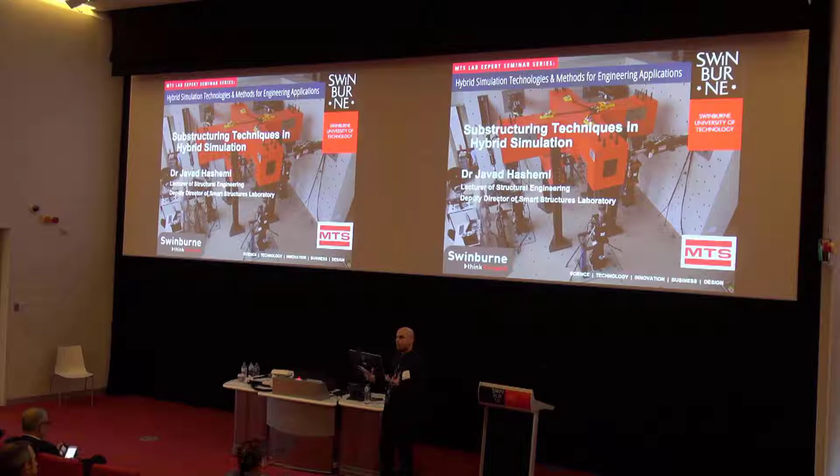So the question that we had was, how can we make sure that the results we get from this hybrid modeling are as accurate as possible?

In this outline, I would like to talk about substructuring first, then introduce some substructuring techniques that were developed, which I was involved in developing: model updating, overlapping domain, geographically distributed, and 6DOF mixed mode control. At the end, I'm going to talk about the development of the MAST system and its application, some projects on the application of the MAST system.

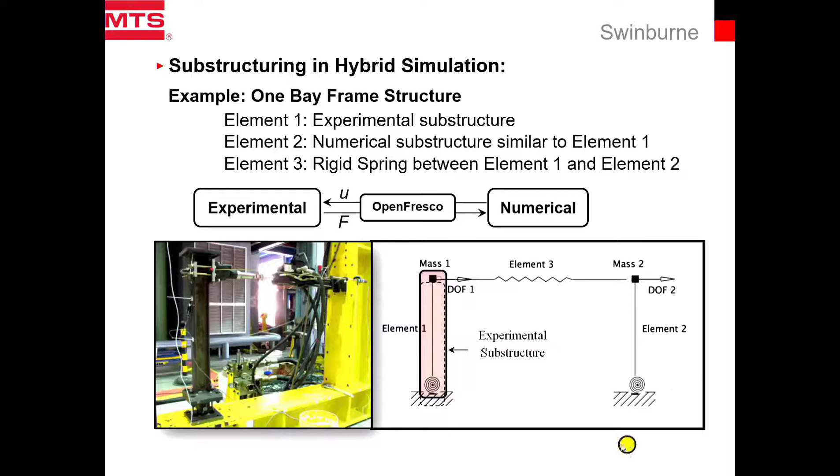So just think about this simple structure. Let's say we want to do the hybrid modeling of this one bay frame. It's very simple. We have two elements, element 1 and element 2. These are cantilever columns. We have plastic hinges at the base, and they are attached together through a truss element, and we have mass at node 1 and node 2.

So let's say resources in my lab are essentially limited, so I have only one actuator that I can use. So that's my single actuator, and just one column, and for the plastic hinge, I use this mechanism to dissipate energy. So that's my experimental part.

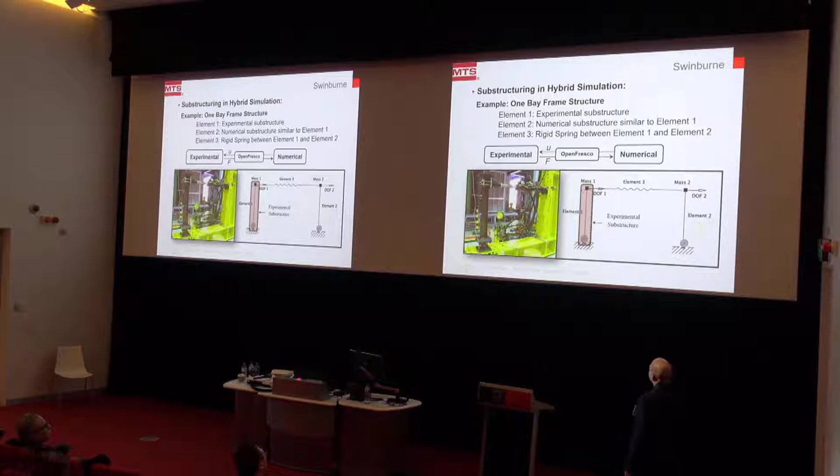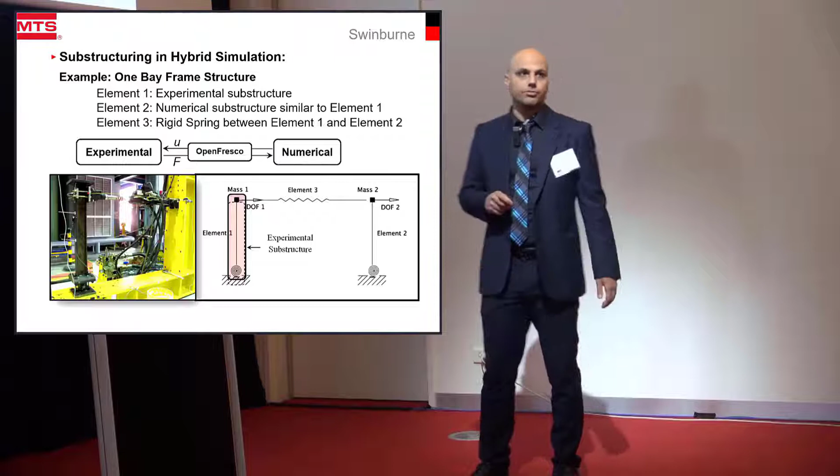What happens is that we model this part in the computer, and we use this actuator to apply the deformation or displacement on top of this column. Then the actuator also measures the displacement and force and transfers this information back to the numerical model. And that happens through OpenFresco, as we discussed in the morning.

So in this example, let's first see how we can model the numerical part. On the numerical side, this truss element, let's model it rigidly. So it's like elastic, rigid. It can easily be modeled in the computer.

Element 2 again consists of an elastic element here, but just for the plastic deformation at the base, we can use the Bouc-Wen model. It's like an example, a hysteretic model where you set some parameters like initial stiffness and the degradation of force and displacement, and you can model this plastic deformation here.

So this one is also modeled experimentally. As you can see, these are identical. The structure has the same design, the same material properties, the same geometry at the base, but because we have limited resources in the lab, we can just test one of them, not the other one.

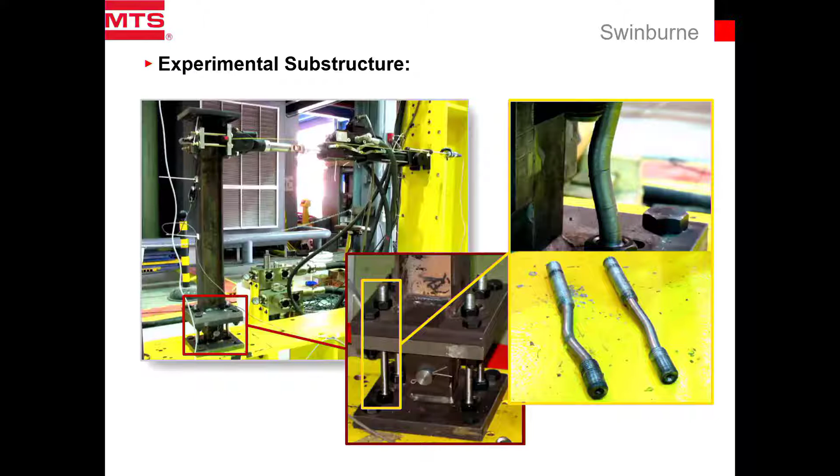And then we subject this to an extreme event. Here we can select an earthquake, which is El Centro, and we want to run the hybrid simulation. On the experimental part, I use this for the plastic hinge. You can see there are these steel coupons, 4 steel coupons that we have here. Through buckling or yielding, we can simulate a plastic moment rotation. The reason for simulating this was just to have sacrificial coupons so we can have repetitive testing when we try things. And of course, we have OpenFresco to help us link these two together.

This modeling was done in OpenSees, so we have all the numerical models, the nodes, the elements, the time integration, everything is modeled in OpenSees. And then OpenFresco is the middleware to connect this system to the lab.

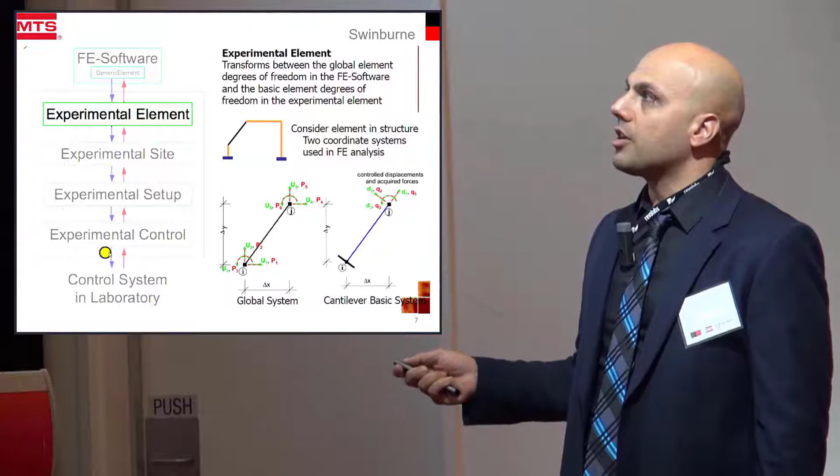I'm not going to go through OpenFresco in detail, but OpenFresco has 4 modules: elements, site, setup, and control. The information is transformed first from a global model to a local model at the element. The job of the experimental element is just to sit within the finite element such that the finite element thinks the model is complete. So that's one module of OpenFresco.

The second module is that the displacements being sent to the lab may not be located next to your computer, it might be somewhere else in the world. So we can have an experimental site.

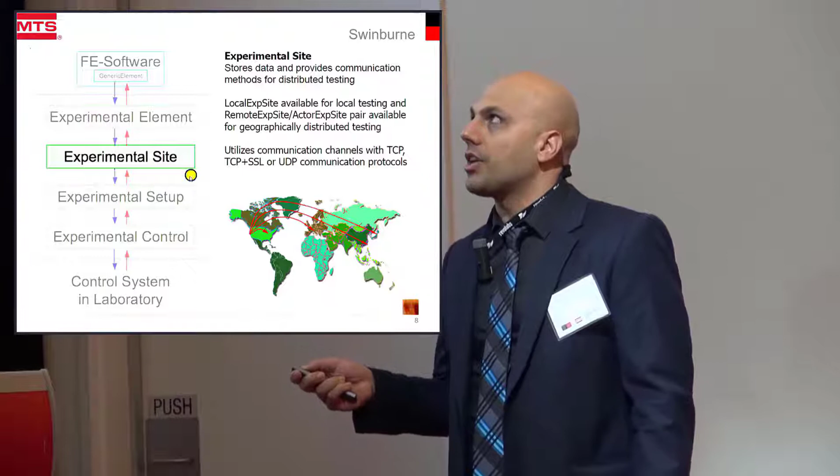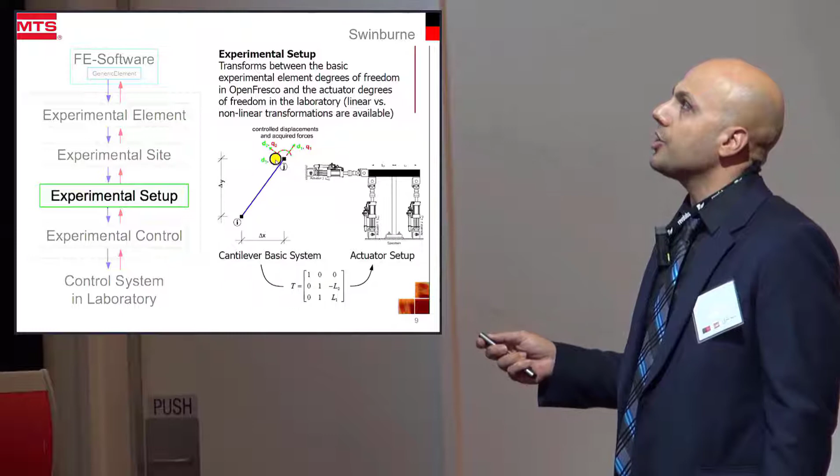Next, the deformations need to be transformed to the actuator system. As you can see, we have these axial, lateral, and rotational degrees of freedom, but in the lab we have actuators like this. So we need another transformation to make sure the actuators move in such a way that we can apply those deformations on top of the element.

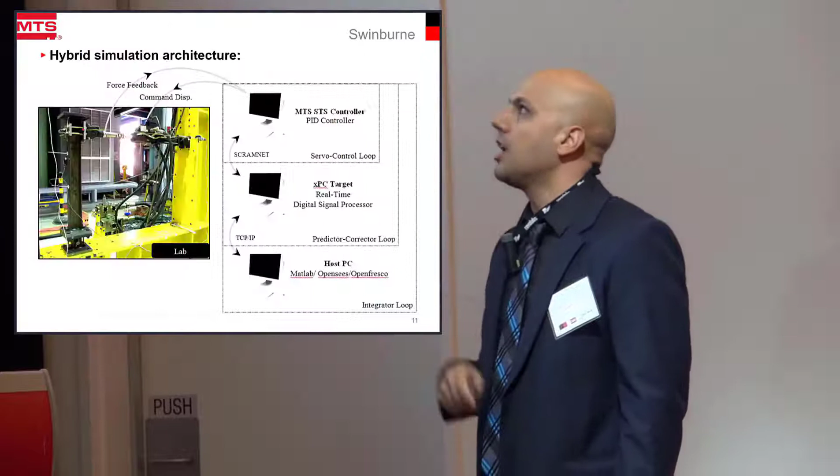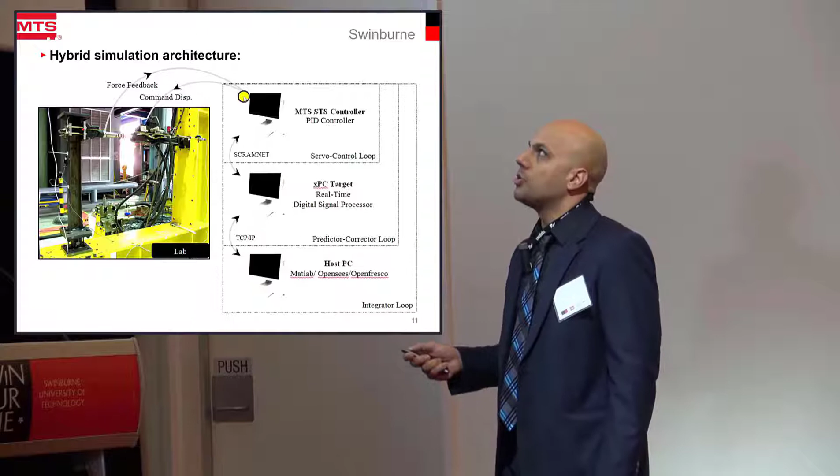And finally, we have the experimental control, the xPC Target, and all the control stuff that other speakers mentioned. Essentially, you end up with this architecture of hybrid simulation: the host PC handling OpenSees, the controller that controls the actuators and reports back the measured forces, and the xPC Target to link different speeds of operation.

Now, that's the result of that hybrid simulation. If you look here, you see the red hysteretic response, the force-displacement hysteretic response, while the black one is the Bouc-Wen model.

If you have a rigid element on top of these two cantilever models, essentially the response for the plastic hinges should be identical, because it's a symmetrical structure with the same masses. So when excited by an earthquake, the deformation applied on both elements should be exactly identical, and therefore the forces should be identical.

But we see that they are different, and that's because of a deficiency in the numerical modeling. Particularly, we haven't set any stiffness and strength degradation, so you see there is no degradation of force and strength -- it's always at the capping point.

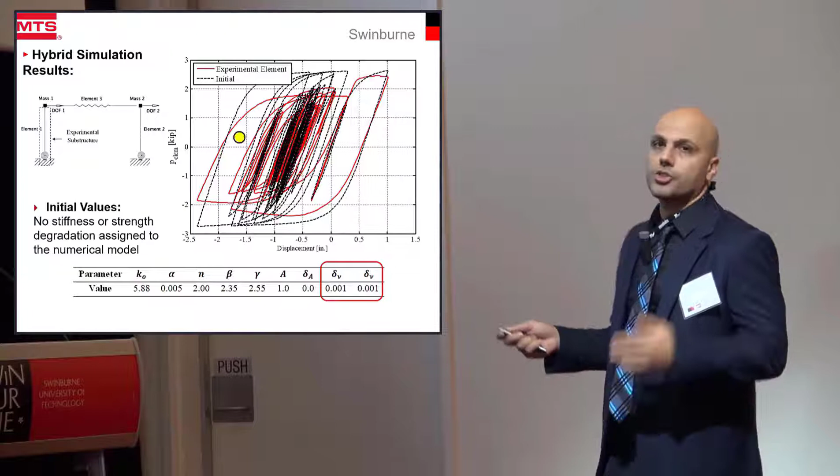Now, this question is being asked frequently -- Sean also asked Professor Mosalam about it -- what about the other elements? You are testing only one, what about the other elements? Professor Mosalam answered that we have used model updating.

That's essentially a new substructuring technique for hybrid simulation. The way it works is that you have the element tested in the lab, but as it's being tested, you start to learn about its behavior. While it's being tested, when it yields, at the same time you can actually update the other models on your numerical side.

Those models that are similar, with similar material properties and geometry, you just don't know the precise yield point to put there. We always say that in a hybrid model, the experimental part is the most critical part -- it's the part that is tested first, damaged first, and we learn about it. We can use that wealth of data to update our numerical model.

So how can we do that? Model updating has been used extensively in automotive and aerospace engineering. For example, cruise control is an online updating model. While the car is being driven, a measurement and sensing system reports to the computer the current speed, and the computer model tries to update the car so the speed matches the target speed you set.

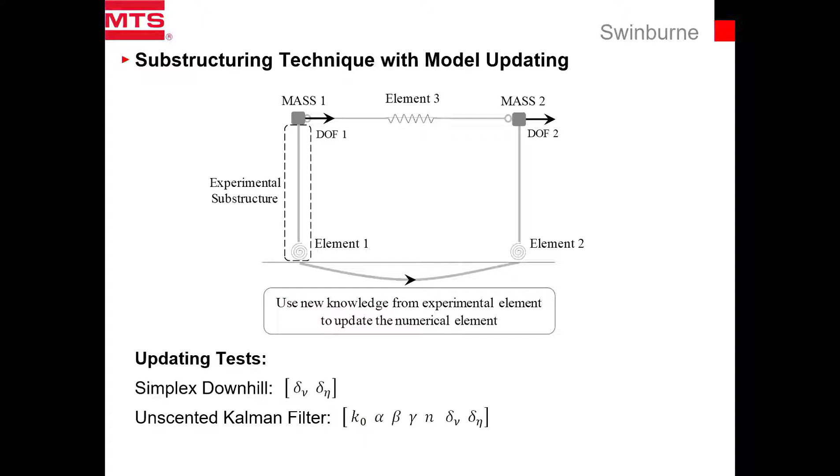That's called state estimation, and I used two packages for that: the simplex downhill and the unscented Kalman filter. They are very famous in automotive and aerospace engineering. With the simplex downhill model, I updated two degradation parameters I hadn't used, but with the unscented Kalman filter, I updated 7 parameters to see if running the simulation would give the same hysteretic response. These are the results.

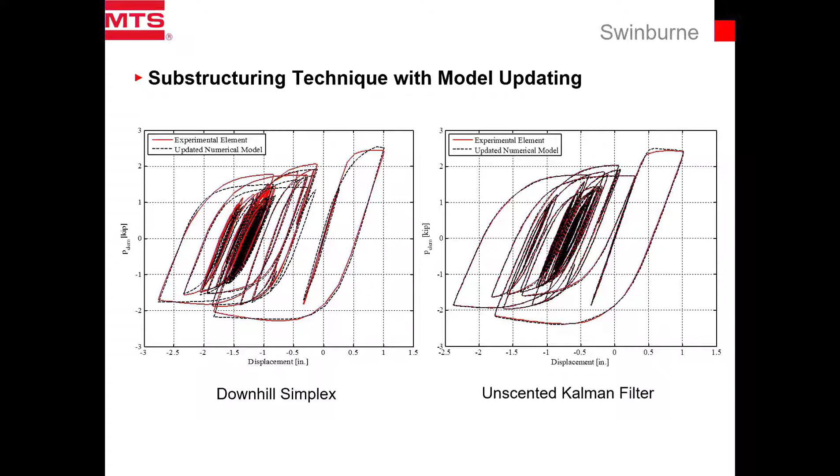You see that with downhill simplex, the results of numerical and experimental are acceptable, but with unscented Kalman filter it's precisely matched. So you can use unscented Kalman filter for online model updating, such that if you're testing part of a structure with distributed damage, meaning other parts will also be damaged, you can learn from your experiment and update your assumptions during the test.

And these are the 7 parameters that the unscented Kalman filter has changed. You see how during the test the parameters have been changed in such a way that you can get that information, or those forces matched with your forces, similar to cruise control matching the speed.

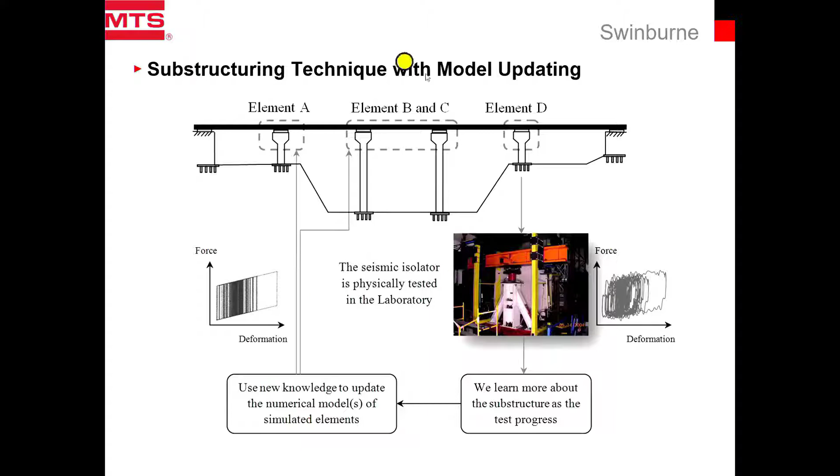And this is another example of model updating. You can test one of the isolations here and update the other base isolations of this bridge based on what you learn from this single testing that you're doing. This will improve the results a lot, and you don't have to spend the construction cost and time of building the entire bridge and all the equipment you need in the lab.

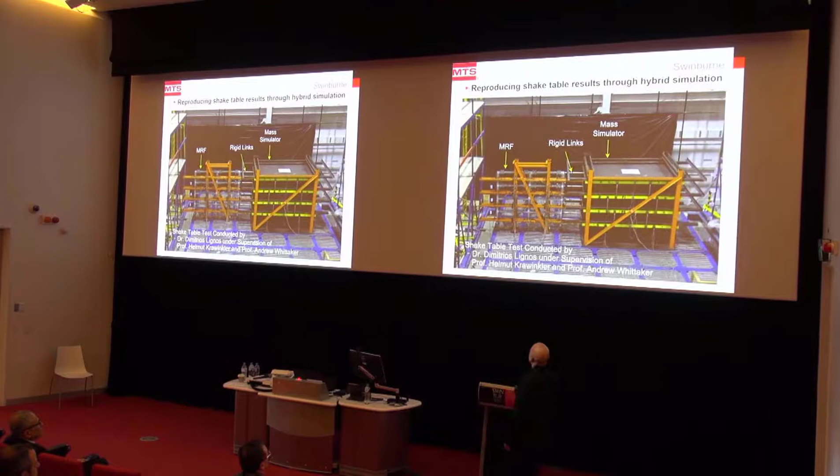So the next substructuring technique I'd like to talk about started from this project. This is a shake table project conducted by Dr. Dimitrios Lignos at the University of Buffalo, under the supervision of Helmut Krawinkler and Andrew Whittaker. This is a 1:8 scale testing of a steel structure.

The steel structure is modeled so that you have all the gravity on your gravitational framing system, which we call the leaning column, and you have a lateral force resisting system, either a brace frame, a moment frame, or a shear wall that holds the structure against lateral push on the gravitational system. We have rigid links attaching this gravity system to the moment frame system, essentially representing the diaphragm action.

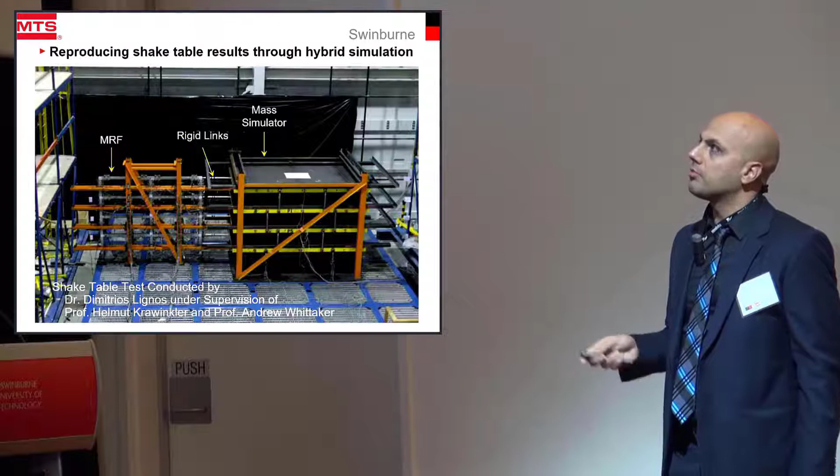The objective of this test was to learn about this moment frame system. As you can see, it was subjected to 5 levels of ground motion: service level, design level, maximum considered level, collapse level, and global instability, where the structure becomes globally unstable and collapses.

You can see that the damages are mostly concentrated in the first story, then the second story, gradually reducing, with the top floor having very minimal damage. So we wanted to see if, through hybrid simulation, we could reproduce this shake table test result.

I'd like to show you the collapse, the global instability of this system, as it was tested on the shake table.

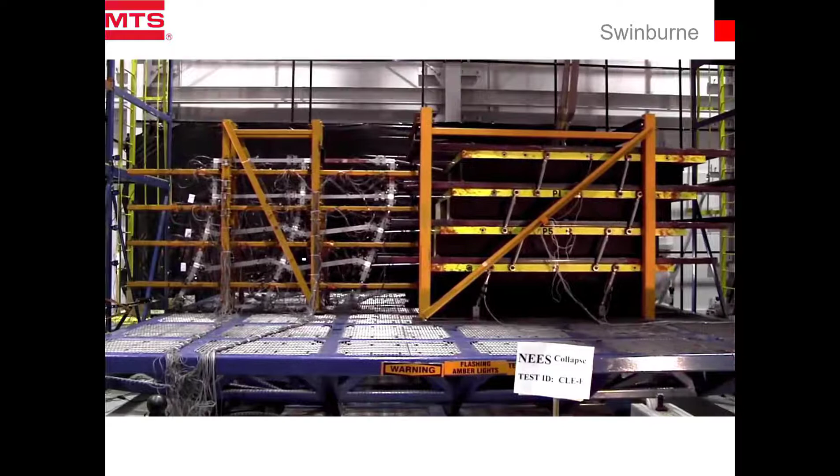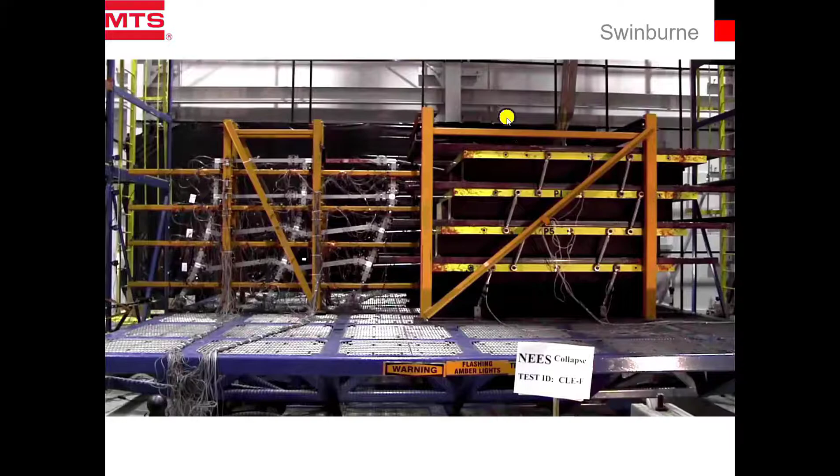You can see that in this test, they needed to design a catching mechanism to prevent the structure from collapsing over the equipment and shake table. Testing collapse through a shake table is expensive and complex, and you need to fabricate the entire thing while not learning much about it, since these parts are all elastic—but you have to put them there to generate the inertia forces.

So to reproduce that through hybrid simulation, we came up with a model in OpenSees. We had the moment frame here, the gravity frame here, and as you can see, they are lumped mass, which we call the leaning column. That's the equation of motion modeled in OpenSees. The only nonlinear part of this system was the plastic hinges, which were explicitly modeled.

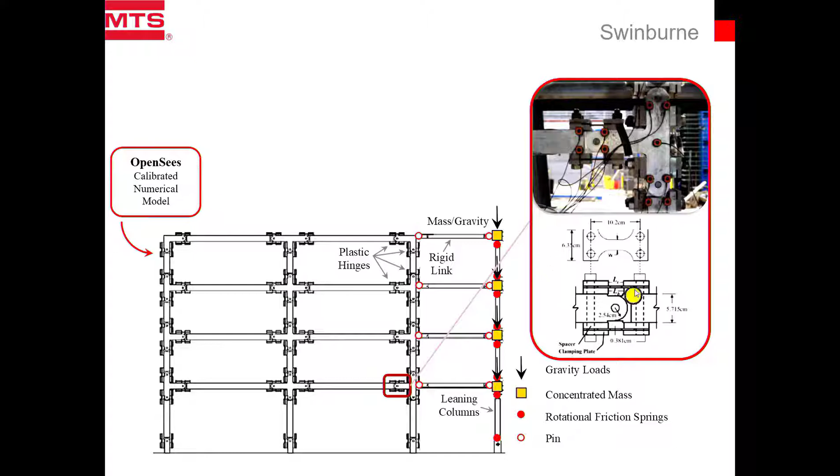Again, they used sacrificial coupons to allow repetitional testing, and they conducted cyclic test results which we used without actual knowledge of the shake table results. Then the challenge was: I want to build only 1.5 stories in the lab, and do the rest in the computer, because if I learn about the first story, I've already learned about the second, third, and fourth stories. So we needed 2 actuators—one here, one there—to apply the inertia forces coming from the gravity part.

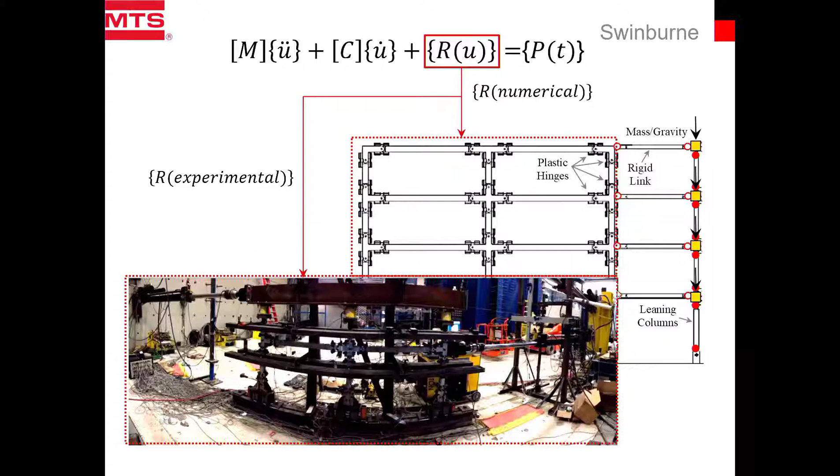And then we cut the structure at the mid-height of the second floor, because that's the inflection point where the bending moment is zero, so you don't need to control the bending there—it's just the shear forces that get transferred.

But we faced a challenge: when you do that, the collapse mechanism you see here is different from the collapse mechanism you see there. The reason is that when you introduce the hinge, although equilibrium is satisfied, the compatibility is not.

Both sides of the pin can have different angles. But in the real case, although the demand of moment here is 0, you have compatibility of deformation. So how could we actually resolve this?

Again, we came up with the overlapping domains. Overlapping means that in conventional hybrid simulation, you have numerical on one side, experimental on the other side. You apply the deformations on the boundary of the experiment, and you measure the resistance. You transfer it back to the numerical part.

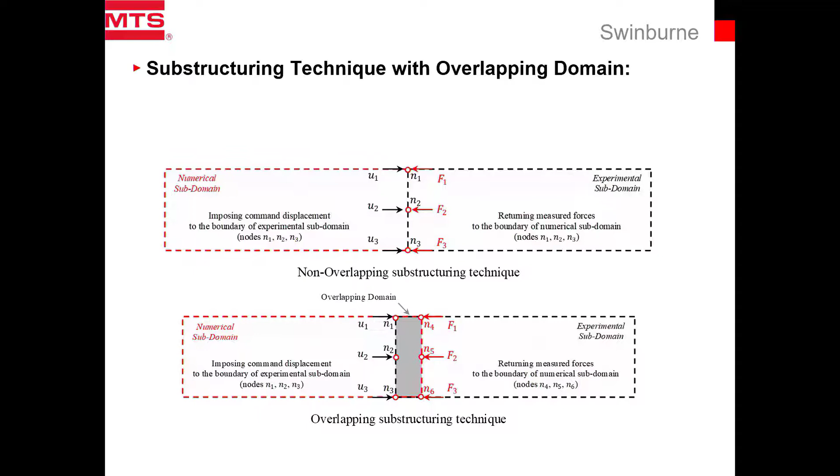But then we propose to extend the domain of numerical and experimental over each other. This way, you need to measure the displacement within the domain of numerical and apply it on the boundary of the experimental, and measure the forces within the domain of the experimental and apply it to the boundary of the numerical. So let's see how we can do it.

So we extended, instead of 2.5 story, we extended another half a story here, and we built this half a story here. So this is the overlapping domain. We use these actuator 1 and actuator 2 to apply these, but then the challenge was

how we can measure the axial, shear, and moment forces from the experiment in here, within the domain, because we don't have the actuators anymore to transfer back the forces. And we need the bending, we need the shear, and we need the axial force. So how can we do it?

I propose to use the strain gauges and load cells. Because the mid part of the column is elastic, if you use the strain gauges, you can plot the strain, and from the strain you can plot the bending diagram and calculate what is the bending at the top and at the bottom. Or you can use the load cells.

So if I place a load cell at the bottom of the column, I have the shear and bending, and I can transform that to the bending and shear at the top.

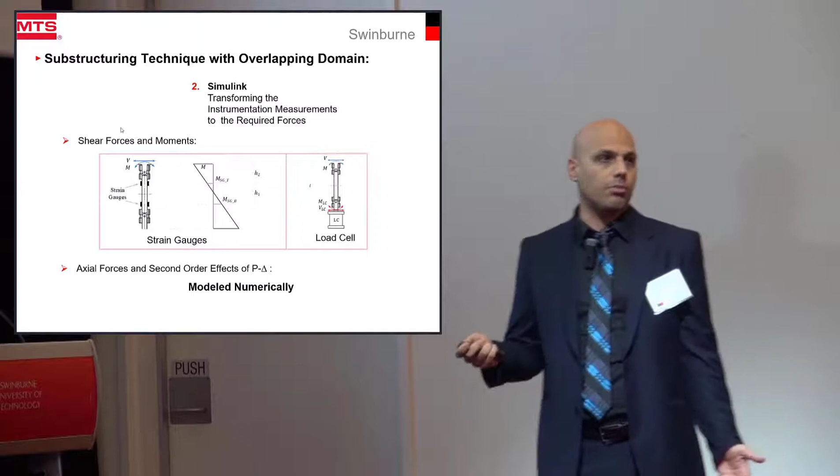But this one, again, posed a challenge, because now the data acquisition system needs to come into the picture. So all the computers should be able to read and write all this information in real time. So we programmed this through a SCRAMNet memory map.

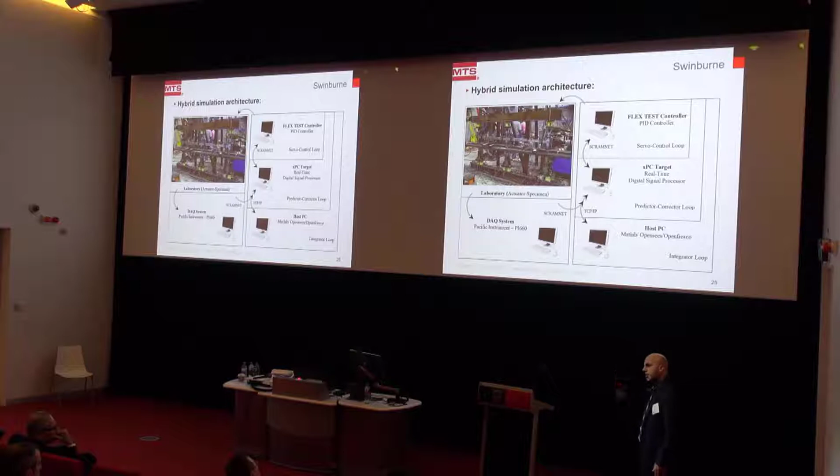So it's a memory shared by the data acquisition system, by the controller, by the XPC target, and all these 3 computers can write and read from these memory maps. And therefore, we could bring that strain gauge data into the hybrid simulation.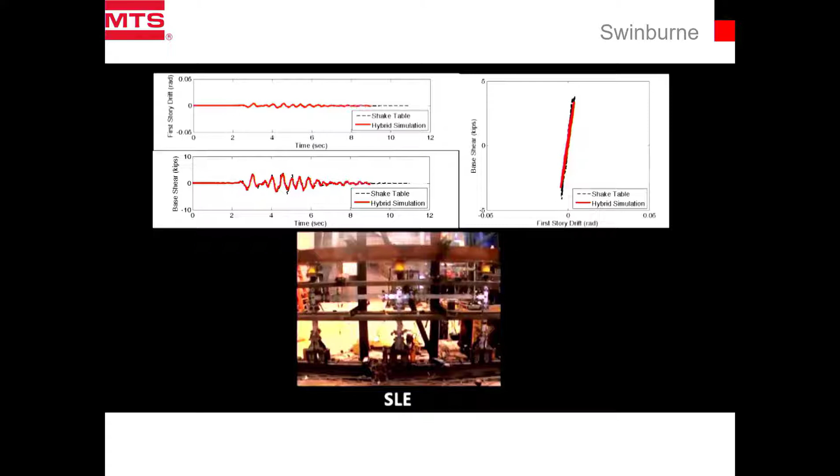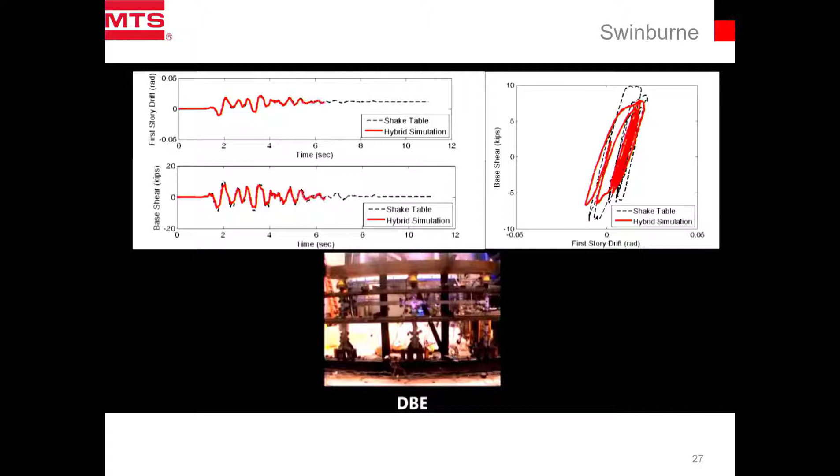And this is the design level. And this is the maximum considered earthquake.

Maybe I'll show you collapse. I don't know why... Yep, oh, that's good. So that's the collapse one.

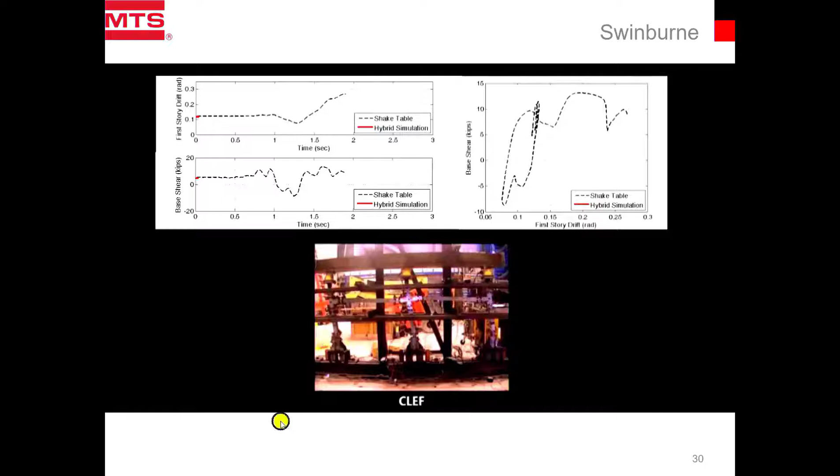We got a pretty good match in all these videos. And that's the final global instability of the frame.

So then we validated that overlapping domain. And then, that model was a 1 to 8 scale model. So we moved to a half scale model after that of a steel frame.

You can see that we extracted this frame from this building. It's a 3-bay, 4-story frame. And we tried to just model this in the lab. It's a half-scale simulation, hybrid simulation.

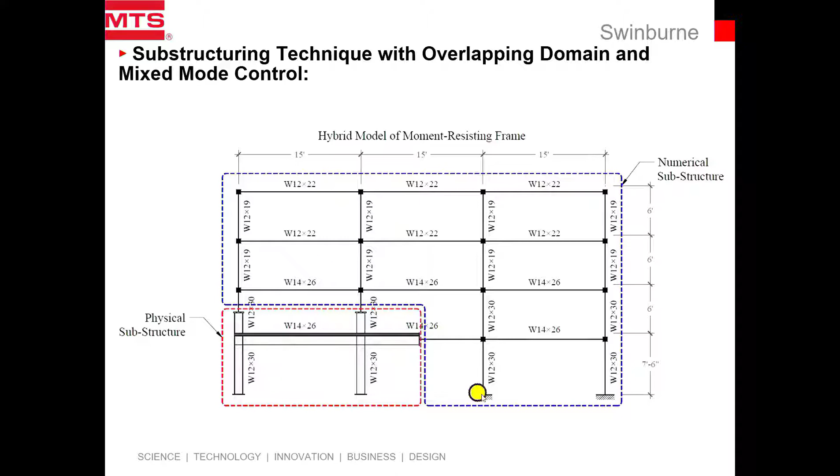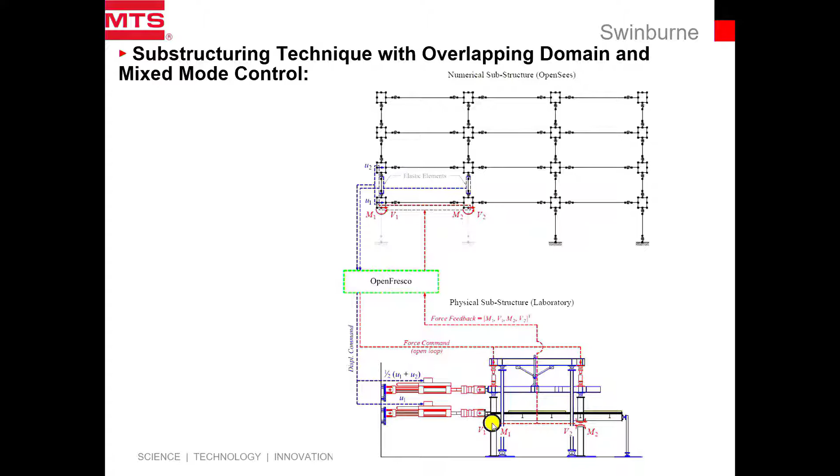And then the rest of the moment frame is modeled in the computer. Again, we used the overlapping domain, but the challenge here was that we needed to also apply the axial forces through force control on the setup.

In the overlapping domain, we added another feature for mixed mode control, meaning that you can apply this deformation, you can apply these forces, but this shear and moment were measured from the strain gauges and fed back to the computer.

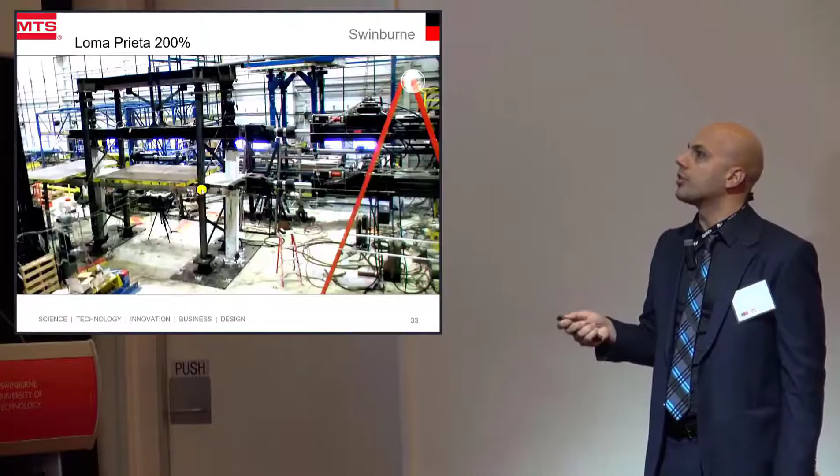So that's the 160% Loma Prieta earthquake. Let me try one more time. Yep, and that's the 200 percent. I can show you the 160 one more time.

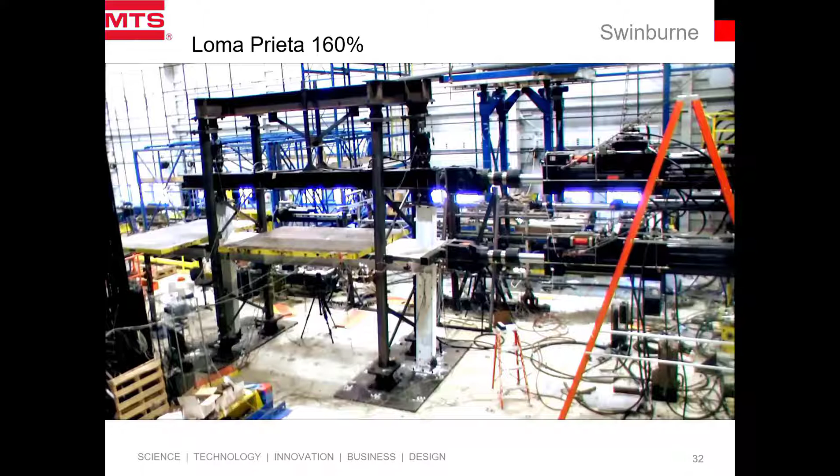The next part, we calibrated this moment frame, and then we attached it to a gravity frame to test the response of the gravity frames under the earthquake. And we repeated this test.

The results we found are that if you consider just the moment frame, the probability of collapse was 1% under 150% of maximum considered earthquake. If you consider the moment frame with the slab contribution on the hinges, it increased to 2.7%. And if you consider the contribution of the gravity frame, which we always ignore and just say it's an unstable system, it increases to 5.4% probability of collapse.

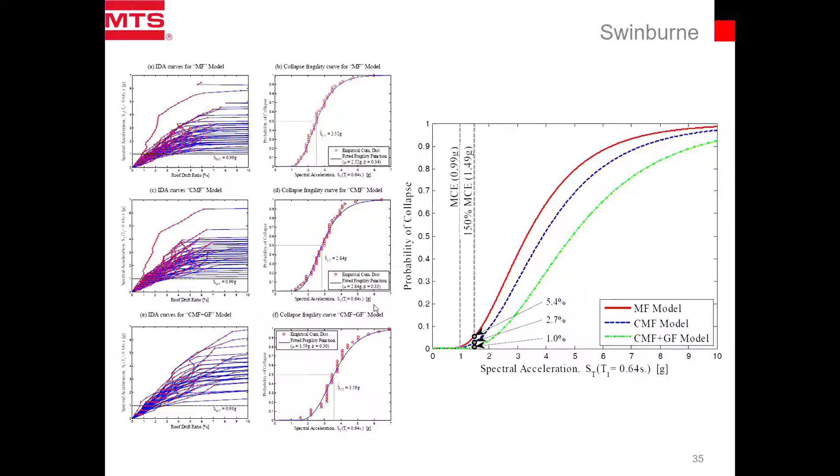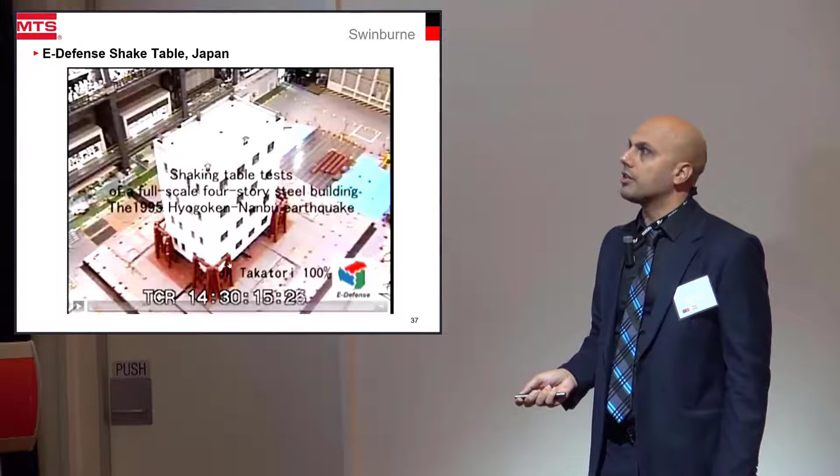Then we thought, okay, now the overlapping domain method is developed and it's with mixed mode. Now let's do it geographically distributed. So for this one we selected a famous experimental test: a 4-story steel building tested on a shake table at E-Defense Japan under 100% Takatori earthquake. Let's see the video.

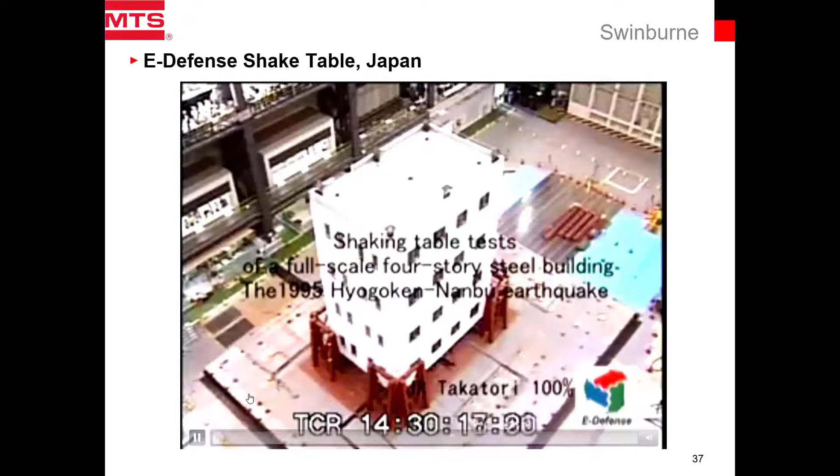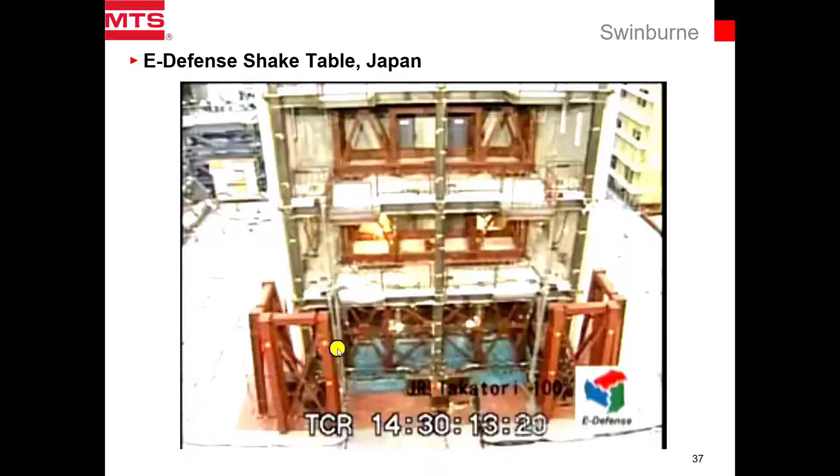When you closely look at this frame, you see that again it's a soft story collapse mechanism. It's a soft story collapse mechanism.

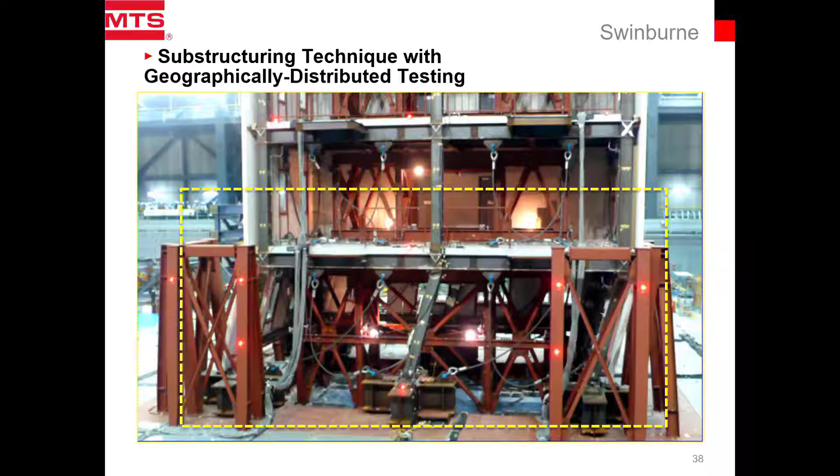So we thought, let's do that 1.5 story one more time of this shake table to see if we can reproduce this. So again we used the overlapping domain and the mixed mode control, but this time we used this part of the structure in Buffalo and the other part in Kyoto, Japan.

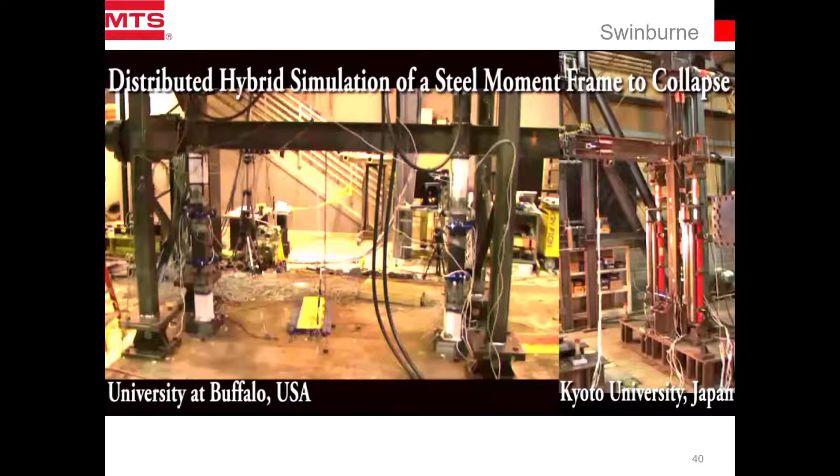So that's the video of that test for different ground motions, and again the results were good. These are the ground motion responses comparing the hybrid simulation and the shake table test for the last two major parts of the ground motion.

Okay, but going back to the same experiments on the shake table, just look at the response of this steel column and these two beams, and we are inside that building. So as you can see, if we want hybrid simulation to be used in collapse assessment...

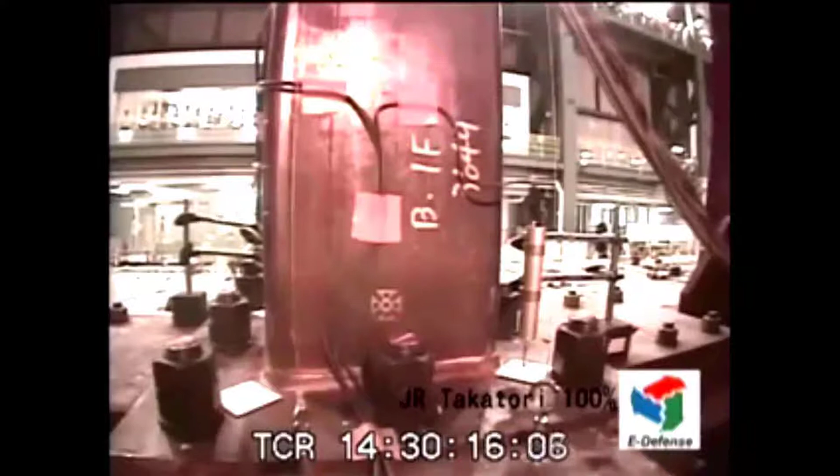You see that it's a multi-directional movement. We have biaxial bending, we have axial forces, we have boundary conditions from both directions, and if an engineer wants us to really simulate this, how all these beams or columns and the damage states we see need to be reproduced by shake table test or hybrid simulation. So that element is essentially critical, and you saw that the beams had no damage.

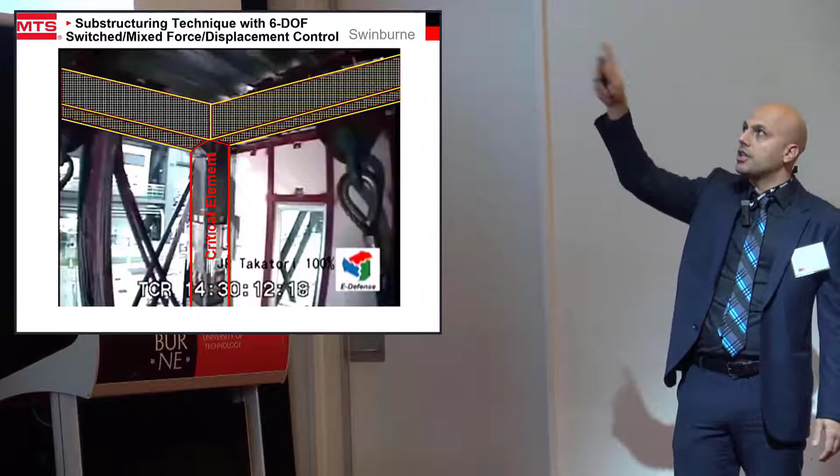So this requires doing this type of simulation. In the substructuring technique, we need to control all 6 degrees of freedom: vertical, lateral, longitudinal, biaxial bending, and torsion. And we need the capability of doing it in mixed mode, because in directions where the structure is stiff, you can't just control displacement, since it would be smaller than the resolution of the actuators, so we need to actually apply forces.

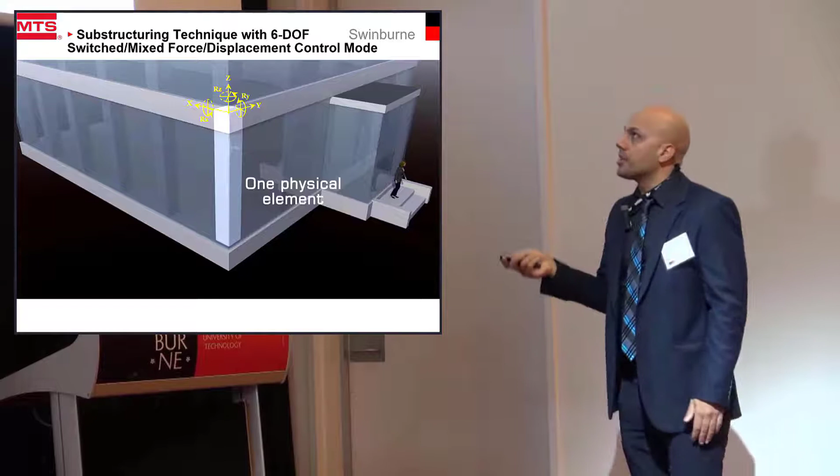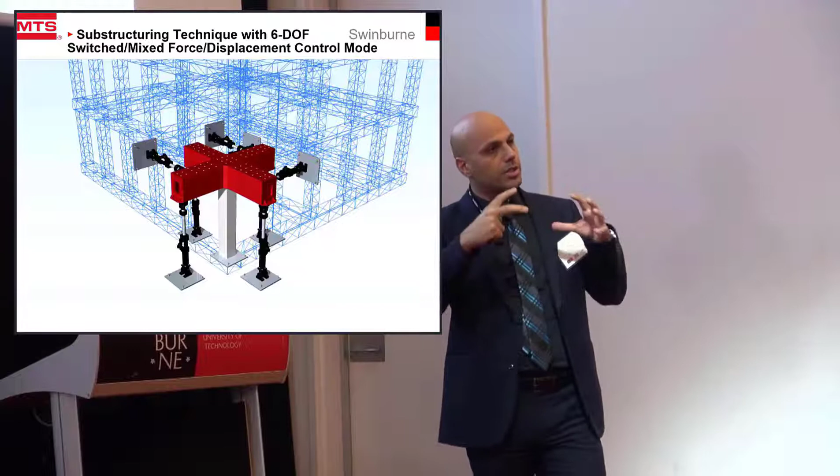So for this purpose, there is a need to develop 6 DOF facilities for hybrid simulation. The MAST system is one of the rare facilities that has this capability, allowing you to apply multi-directional, time-varying, highly coupled 6 DOF forces and deformations on top of your experimental element.

Another nice feature is also switched control. During the test, you can switch between displacement and force control in each degree of freedom you're controlling, which significantly increases the capabilities of hybrid simulation.

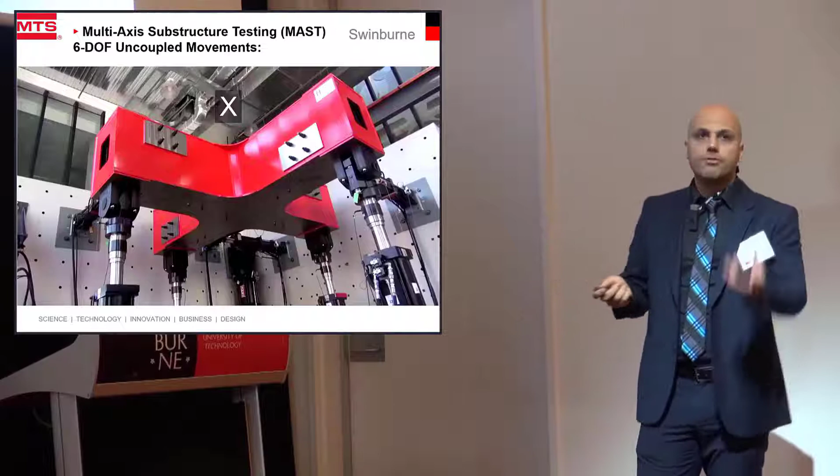I'm not going to cover a lot about the MAST system since we already discussed it, just to let you know that the capacities are also large, so it's suitable for large scale and full scale testing. We have 4 vertical actuators at 1 meganewton, and 2 pairs in perpendicular directions, 1 meganewton in each direction, that can be used for both hybrid simulation and quasi-static testing.

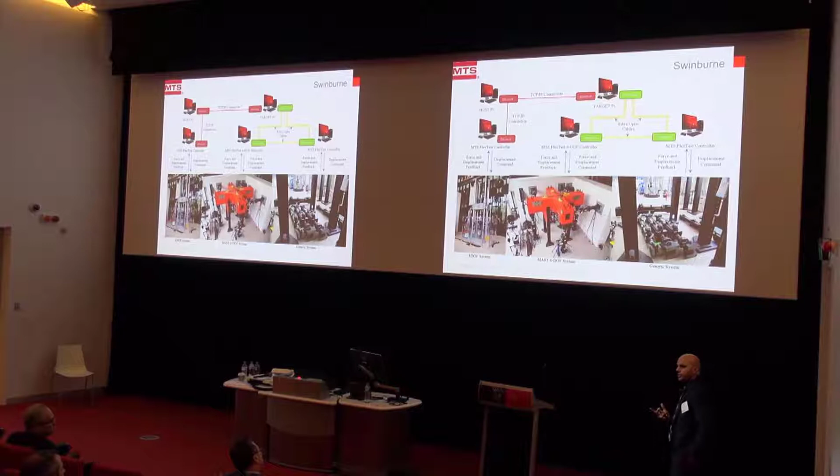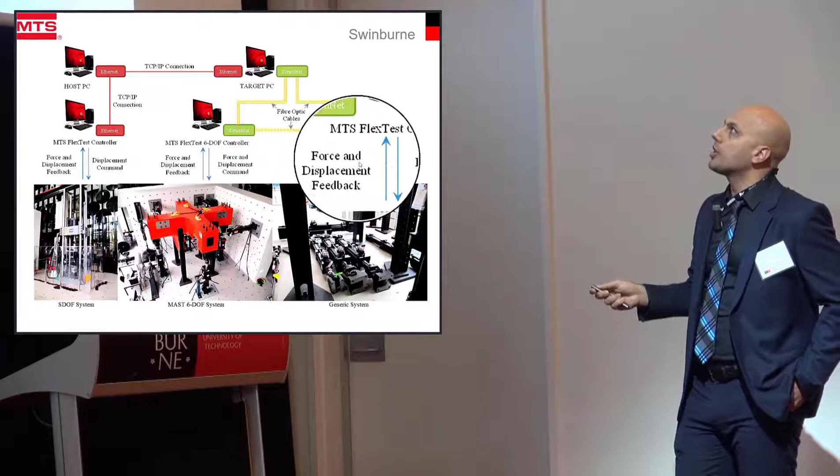However, note that the MAST system is not the only feature of the Smart Structures Lab for hybrid testing. We have the 1 meganewton machine here, which can be connected to the host PC. We have the target PC attached to the MAST system, and also a generic controller that can be used for generic actuators. All 3 computers are on ScramNet.

This means that you can have an experimental element that is tested by the MAST, and at the same time by other actuators that you attach to the element. So it's really good and can accommodate different needs of different experiments easily.

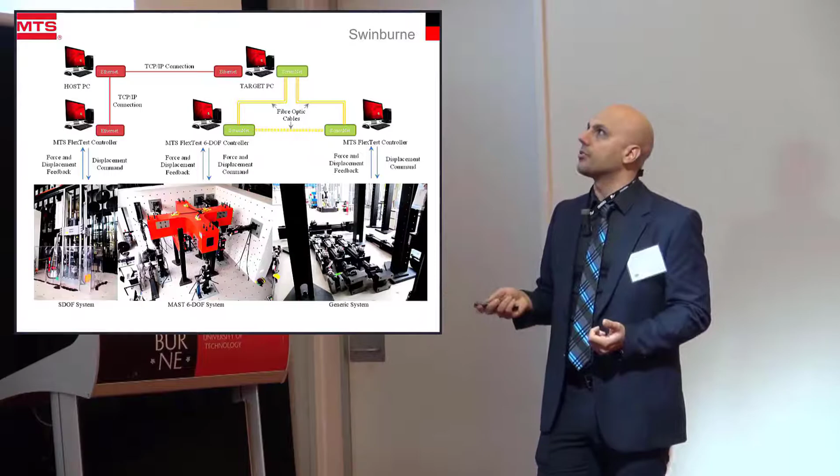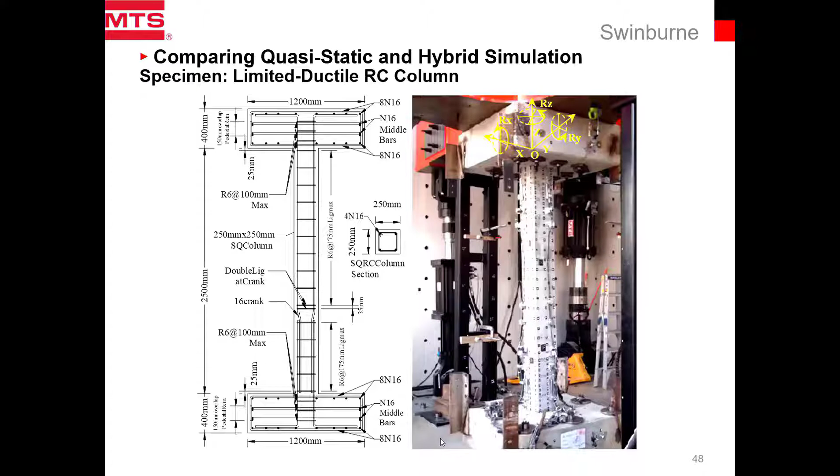At the last part of my presentation, I want to go over a couple of experimental tests we've conducted here with the MAST system and the substructuring of 6 DOF mixed mode control. The first one was to assess the performance of a limited ductility RC column under 6 degrees of freedom of testing. We tested that once through quasi-static cyclic testing and once as part of a numerical model in hybrid simulation to see how the results differ.

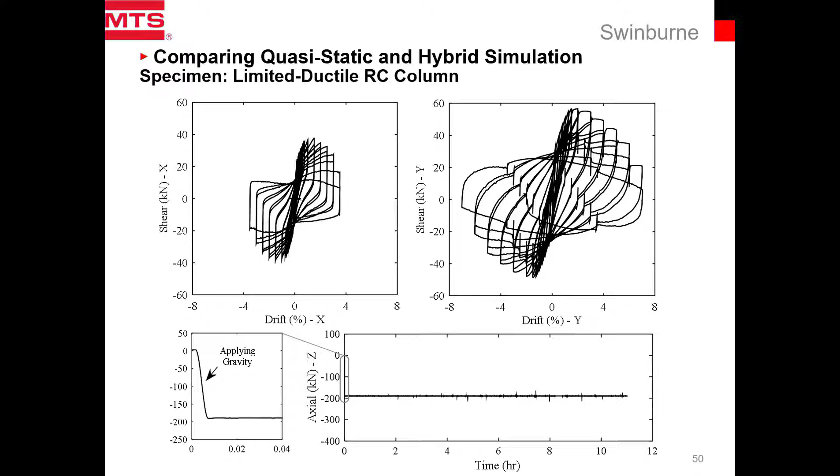The applied lateral deformation follows this hexagonal shape. These are the results, so you see there are large cycles of energy dissipation, but the vertical force is controlled in force. We applied just a constant force, and the facility is able to control the vertical force in force control and the biaxial bending in displacement control.

And that's really rare to see in hybrid simulation. Then we tested the same column, identical, as part of a building. As you can see, we selected the corner column because it is subjected to overturning moments from both directions, and that causes a lot of force oscillations on top of the column.

So that makes it really the case for hybrid simulation. This video shows the response of the hybrid testing. The column in the hybrid testing, we use the Imperial Valley earthquake at 4 levels of ground motion. The top 2 plots are the building's global response, the middle one is the axial force oscillation on top of the column.

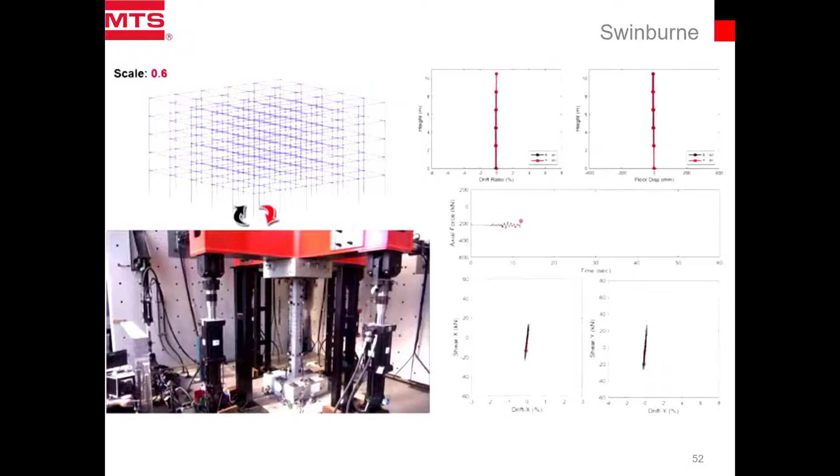And the 2 bottom plots show the dissipation of energy in both directions, X and Y, which is the shear force versus drift. That's the service level ground motion. As you can see, when you compare with cyclic testing, all the energy tends to dissipate only on one side, rather than cyclic where it goes to both sides. This is called the ratcheting behavior.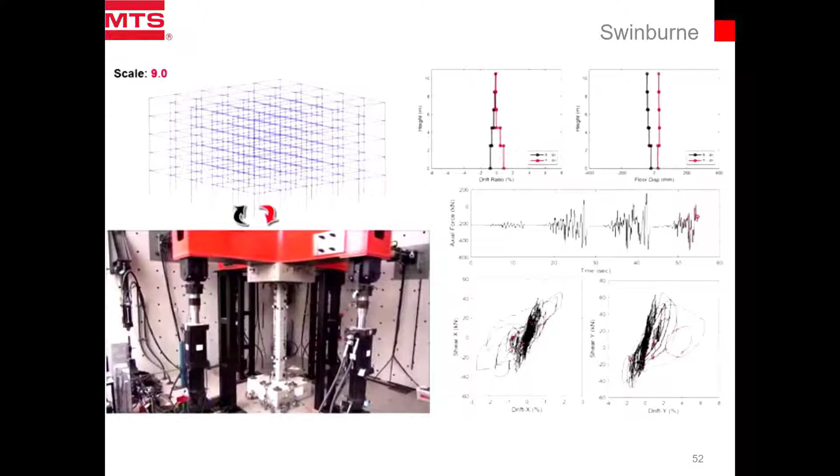You can see that the axial forces, when you assume there is gravity force, in reality could go up to 3 times the gravity force during a ground motion, and even to tension when there is overturning to the other side of the building. So the column is being subjected to large axial forces, and on the other hand, all the damage is on one side.

Comparing these two together, you see that this dissipation of energy to one side, the ratcheting behavior, shows that the column hasn't been damaged much in hybrid simulation, while the quasi-static testing is an overestimation in applying the damage.

On the other side, the axial forces in quasi-static are constant, while in hybrid simulation they are higher. So you could say quasi-static is a conservative way, because these two need to be considered at the same time. In hybrid simulation, axial force is more risky, but the ratcheting behavior and dissipation on one side shows less damage, so it's hard to assess if you just rely on quasi-static testing.

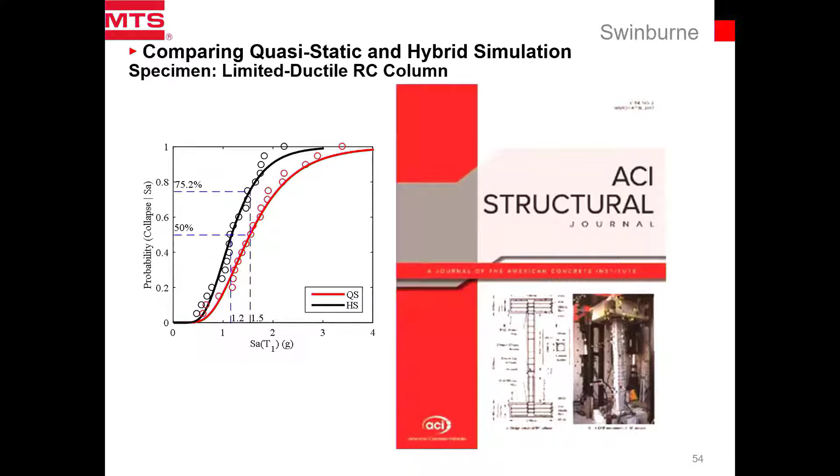So we calculated the risk of collapse, and we found that the results are quite different. These results of this study were published in ACI Structural Journal, and the experiment was featured on the cover page.

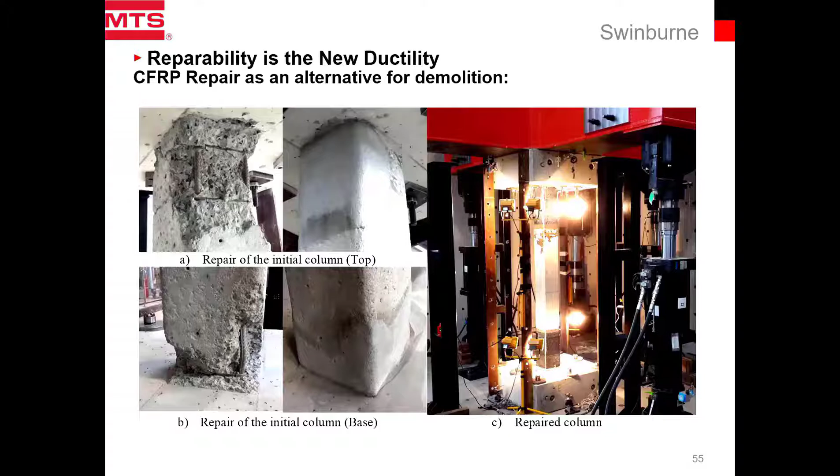Another application of the MAST is on the repairability of structures. We call repairability the new ductility, meaning structures are normally designed to deform a lot and dissipate a lot of energy just to protect the life of people. But the experience from Christchurch was that you end up with a city full of deformed structures, essentially all needing to be demolished and reconstructed. So the new strategy for design should be that structures are designed in such a way that after extreme events they can be repaired.

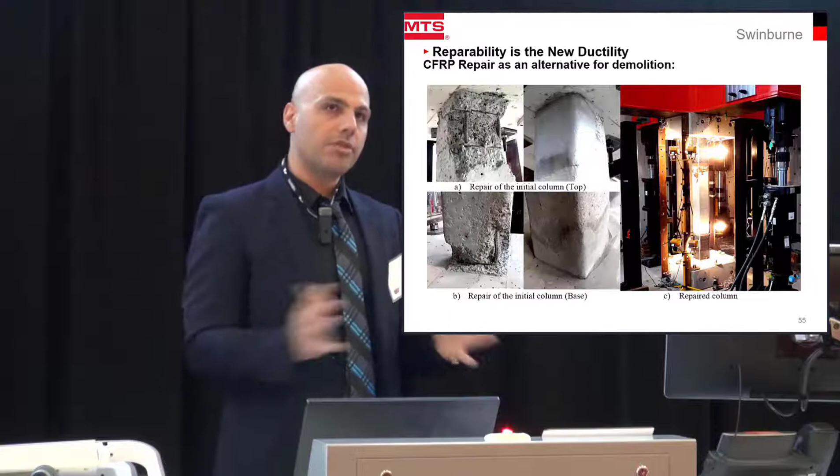So we used CFRP on the damaged column to repair it and see how the performance compares to a brand new column. This video shows the response of the repaired column as opposed to the brand new initial column that was tested.

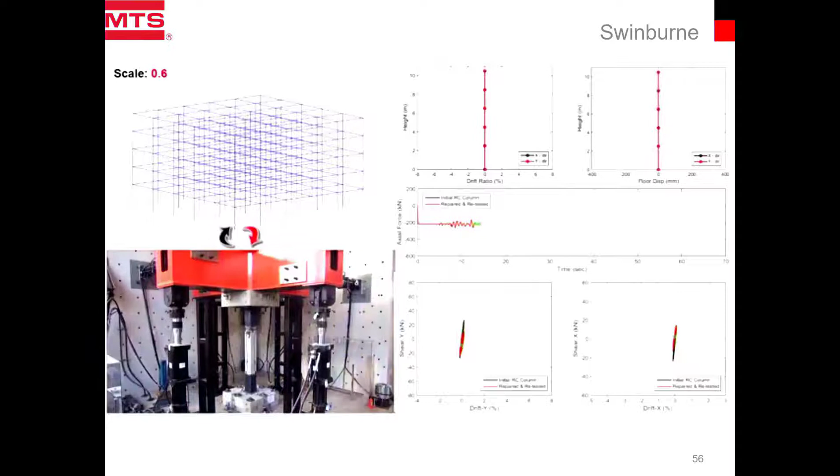So you see the FRP application on top and the bottom. The repair was such that we didn't replace the damaged reinforcement. The reinforcement had yielding, rupture, buckling. We just kept it as is, applied mortar, and wrapped it with FRP. So of course we couldn't get the sufficient strength compared to the initial one, but the confinement of the FRP increased the ductility of the column a lot. So that's a good outcome.

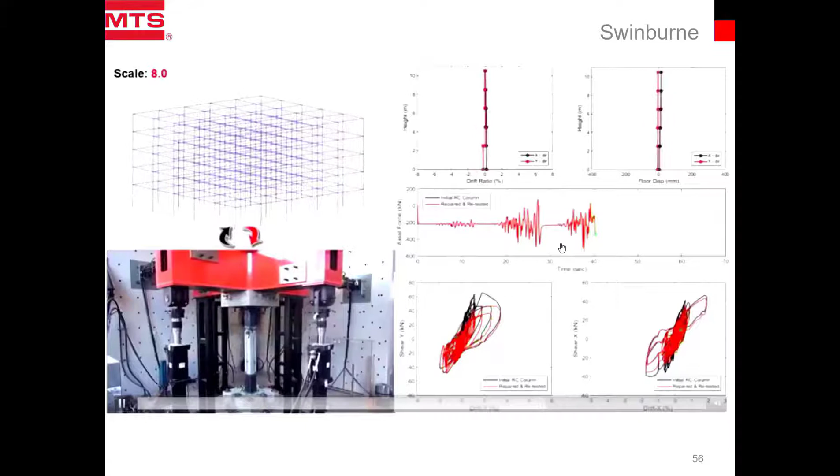So if you see, after large deformation, the hybrid CFRP can actually capture the response of the initial column.

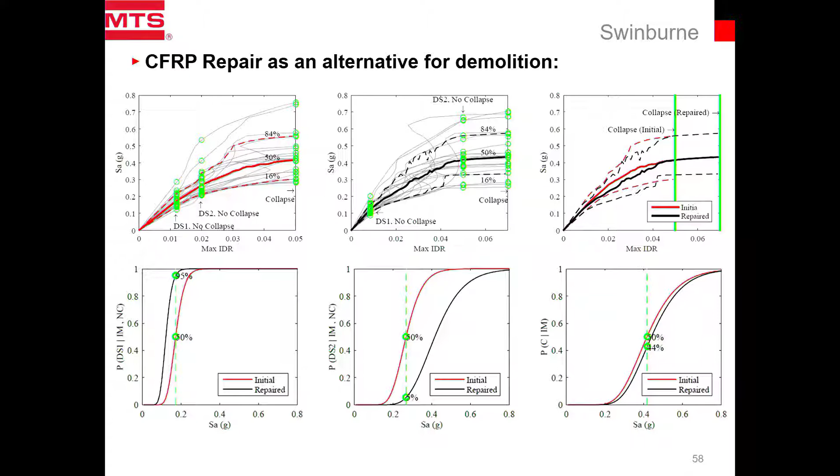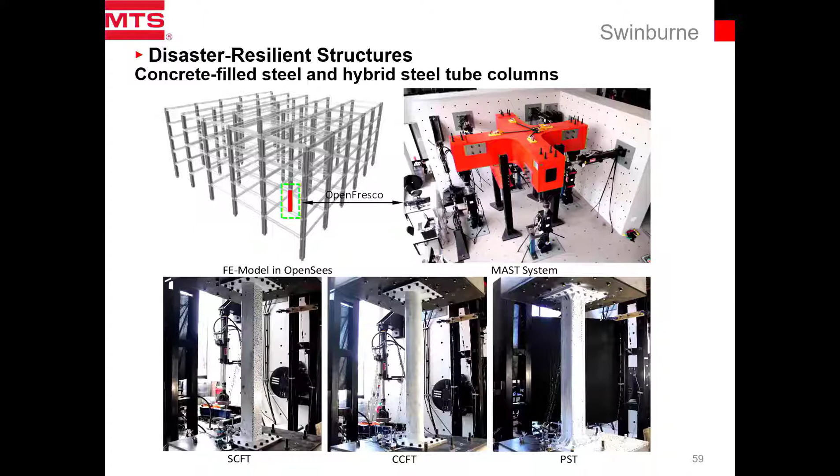Another application of hybrid simulation was for disaster resilient structures. We tested square concrete filled tube columns and circular concrete filled tube columns, which are conventional. They are very good because the steel provides both longitudinal and transverse reinforcement for the concrete, and the concrete is confined by the steel, providing larger axial and flexural capacity and delaying the buckling of the steel. This is really good, with a lot of capacity and ductility, very appropriate, but they have never been tested under complex six degrees of freedom testing. So we've done some testing for high seismic regions.

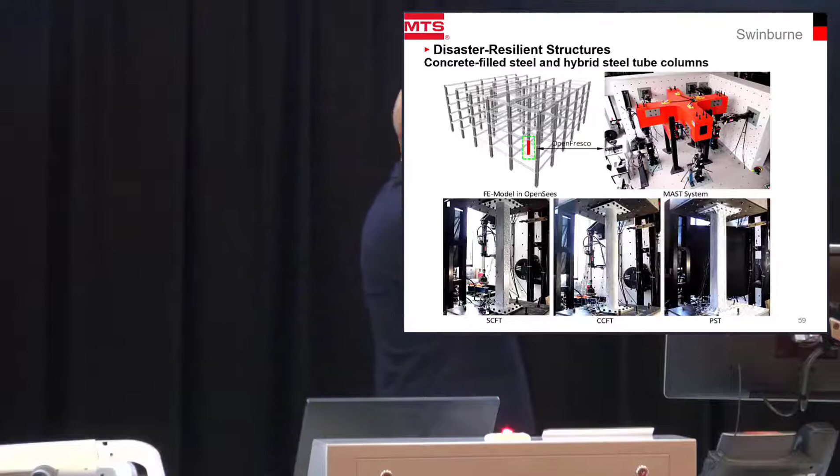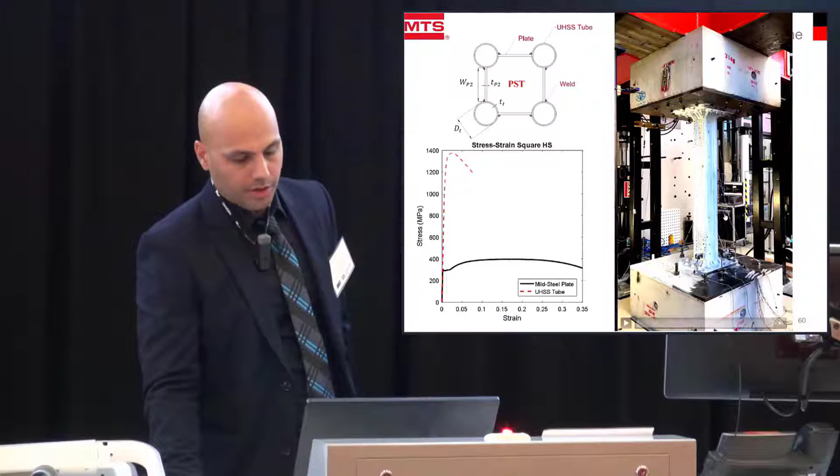They are appropriate. Then a concept was developed, a prefabricated steel tube, with Monash colleagues, with Dr. Amin Haidarpour. This test column is a hybrid column consisting of 4 steel tubes on the corners, which have large capacities but limited ductility. We also have plates attaching these 4 tubes together, made of mild steel, providing sufficient ductility. That's a pilot test we conducted with hybrid simulation of this column to see how it performs, and the results are quite promising for lower seismicity regions, and it can definitely be used there.

So there's a lot more needed on the development of the connections, the detailing at the top, column-to-column splicing, and all that is under investigation currently.

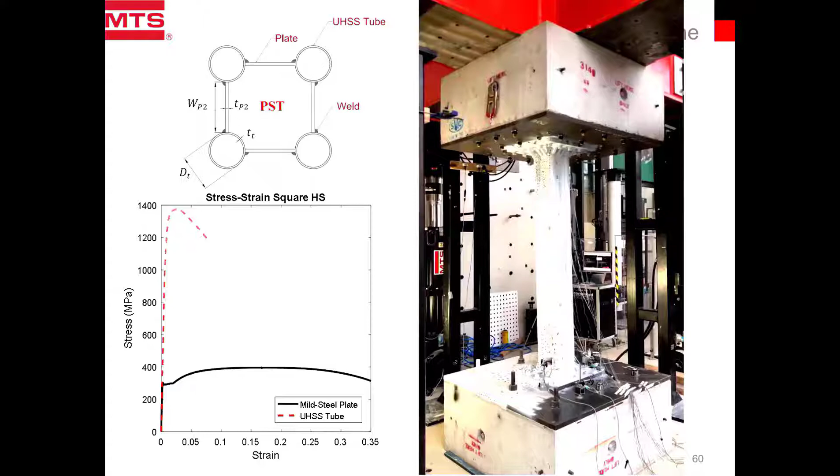And finally, this demonstration, this time history - after Graham's presentation today we'll go to the lab and you'll see that MAST system with this displacement time history. Finally, we have tried to expand hybrid simulation to multi-hazard engineering.

As you know, tsunamis these days are very important. In the last 2 decades, 33% of total deaths and 35% of total economic losses from natural disasters have been linked to tsunami, and essentially 6 out of 10 mega cities are at risk of tsunami.

So what we want to do is multi-hazard engineering, because hybrid simulation gives you the luxury of modeling the dynamic loads in the computer, so you don't need to simulate the dynamic load in the lab. You can work out, under seismic combined with tsunami, what boundary forces the column will need to experience, then go to the lab and apply them to see if the column can perform. That's coming in the next 2 months.

So that was my presentation, and thank you, and I would be glad to answer any questions.